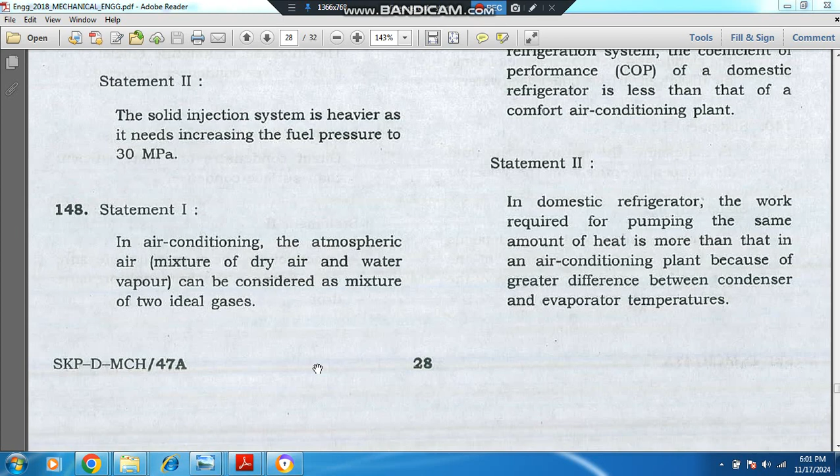Hello, welcome again. We are solving Engineering Services pre 2018 mechanical engineering paper.

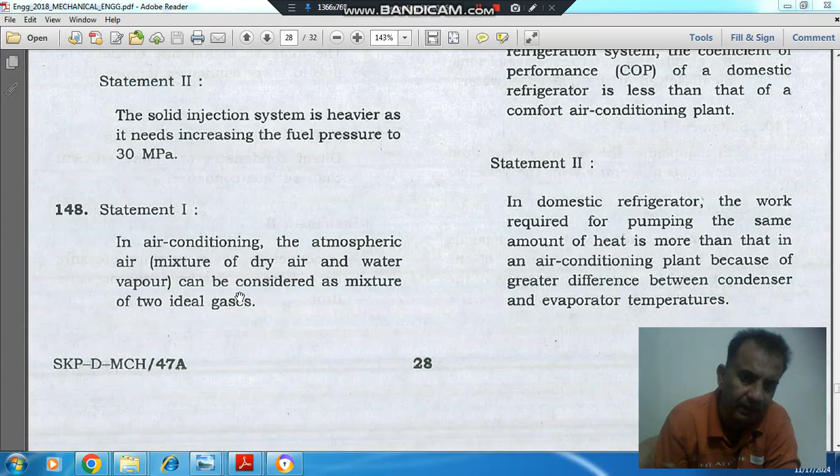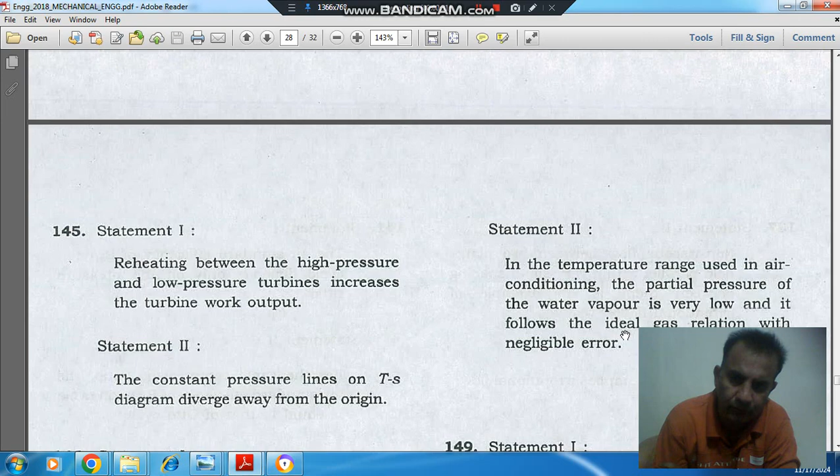Question number 148, statement 1: In air conditioning, the atmospheric air, a mixture of dry air and water vapor, can be considered as a mixture of two ideal gases. Statement 2: In the temperature range used in air conditioning, the partial pressure of water vapor is very low and it follows the ideal gas relation with negligible error.

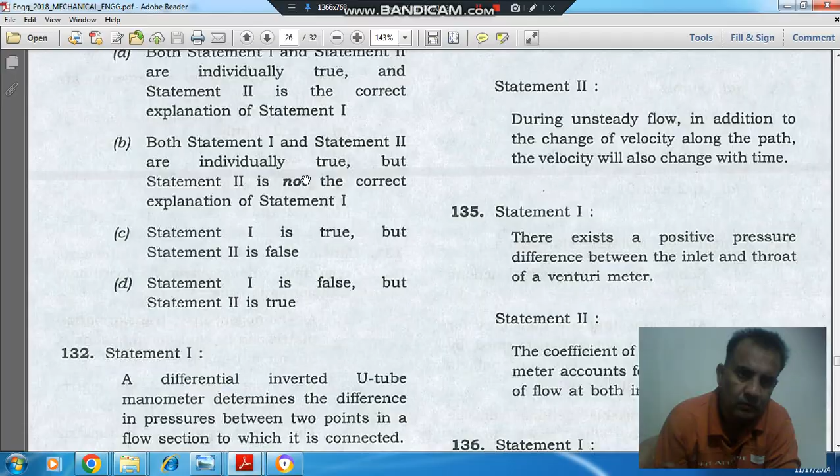So options are: option A, both statement 1 and statement 2 are individually true and statement 2 is the correct explanation of statement 1. Option B, both statement 1 and statement 2 are individually true but statement 2 is not the correct explanation of statement 1. Option C, statement 1 is true but statement 2 is false. Option D, statement 1 is false but statement 2 is true.

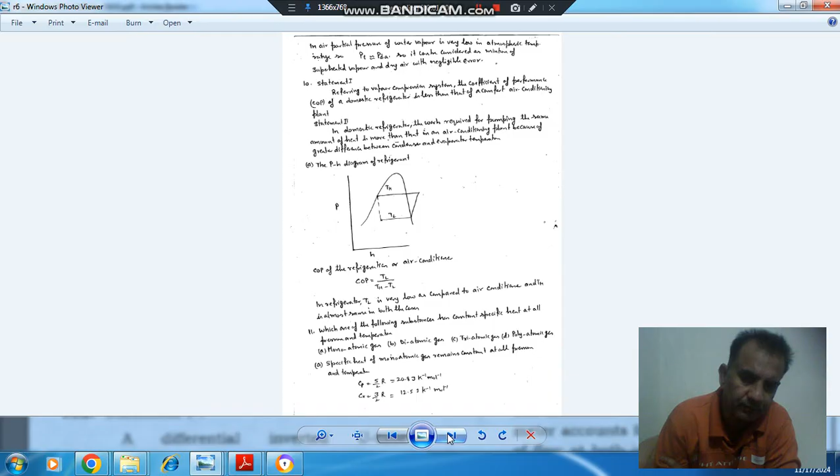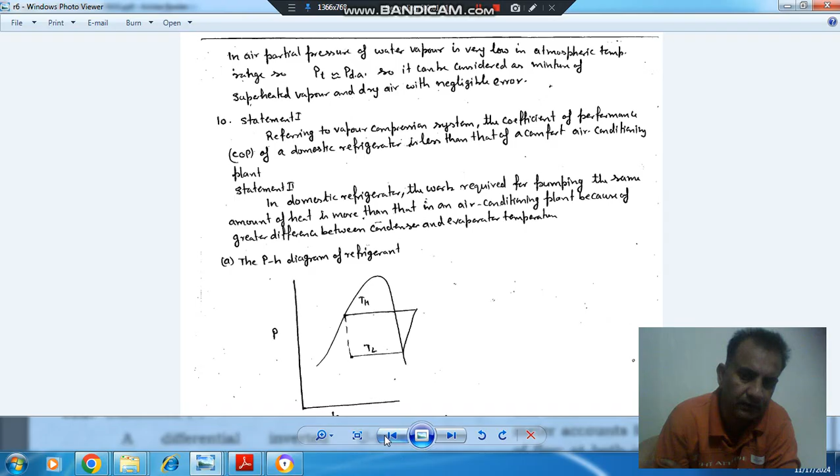So here, according to Dalton's law of partial pressure, total pressure is pressure of dry air plus pressure of water vapor. PT is total pressure, PDA is dry air pressure, PV is vapor pressure. So vapor pressure is very low, and so total pressure can be assumed as pressure of dry air, and dry air is an ideal gas, so it can be considered as an ideal gas or a mixture of two ideal gases.

Okay, so statement 1, that in air conditioning atmospheric air can be considered as a mixture of two ideal gases, is true. And in the temperature range used in air conditioning, the partial pressure of water vapor is very low and it follows the ideal gas relationship because it can be treated as a superheated vapor. Superheated vapor behaves like an ideal gas, so it can be taken as ideal gas. So both are true, and statement 2 is the correct explanation of statement 1.

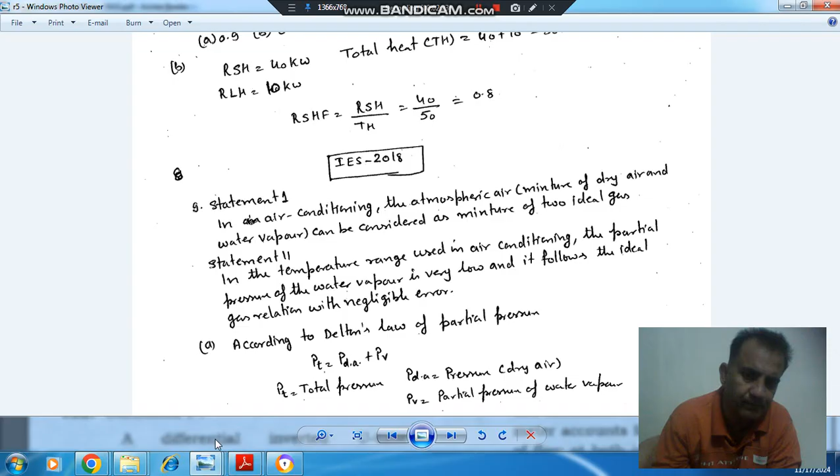So answer is option A. Answer is both statement 1 and statement 2 are individually true and statement 2 is the correct explanation of statement 1. So that is it.